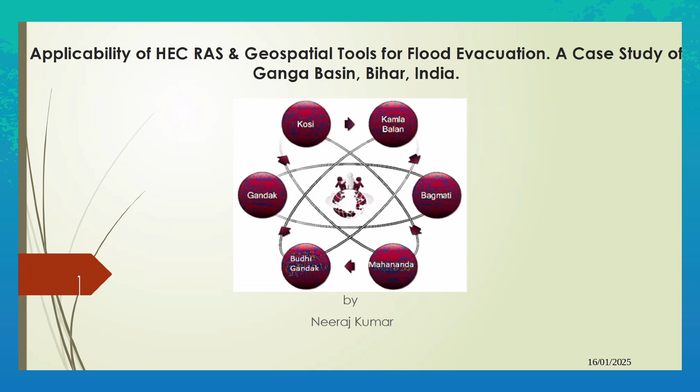So I'm going to present some of my work. The topic of the presentation is applicability of HEC-RAS and geospatial tools for flood evacuation, a case study of Ganga Basin, Bihar, India. HEC-RAS is software which is used for river study, and geospatial tools like satellite imagery and other geospatial software data we use especially for flood evacuation.

In Bihar, we have six major rivers: Gandak, Budhi Gandak, Bagmati, Kamla Balan, Kosi, and Mahananda. These rivers are among those that contribute maximum flooding, and these rivers are being degraded.

I'm going to share another slide. I want to show the location of the river. This is the entire Bihar. In the bottom, the Ganga River flows from west to east. Somewhere the broken green line is shown—the Gandak River starts from Nepal, and all these rivers start from Himalayan foothills: Gandak, Budhi Gandak, Bagmati, Kamla Balan, Kosi, and Mahananda. These are the locations.

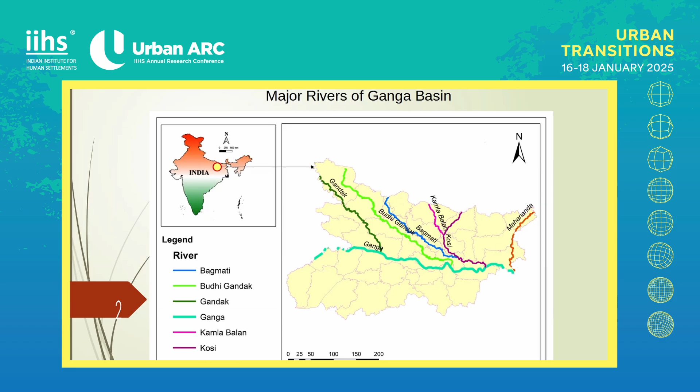I want to introduce something about what is happening here. This is a report published by the Centre for Research on the Epidemiology of Disasters. It tells that flood ranks the highest among disasters in the entire world, and people are also affected mostly by flood, among the number of types of disasters like flood, storm, earthquake, extreme temperature, landslide, drought, wildfire, and volcano. But flood is one of the most devastating in nature.

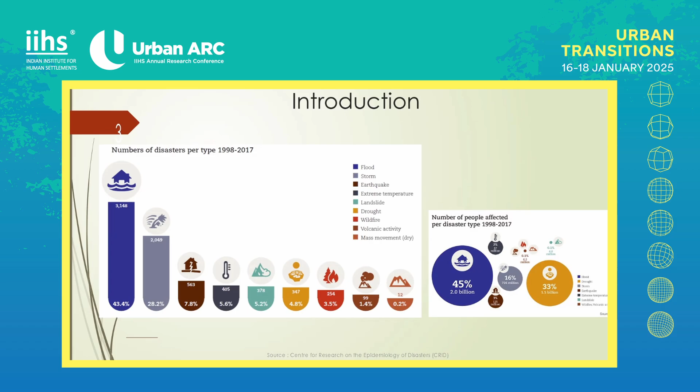And we are in the same place. Every year we have to start from new, from the beginning. Every year the center allocates a huge fund for restoration of river, shifting the people, giving them some grants, some funds, around 6,000 rupees every family. But the situation is same from past couple of decades.

So first we have to diagnose why this is happening, almost every year we are facing the same problem. So we started a study and found that the siltation in river is continuously rising in all major rivers. This is the graph of river Gandak.

From 1972, we can see the area was silt area. Silt area is that the river is flowing and somewhere the siltation is happening every year.

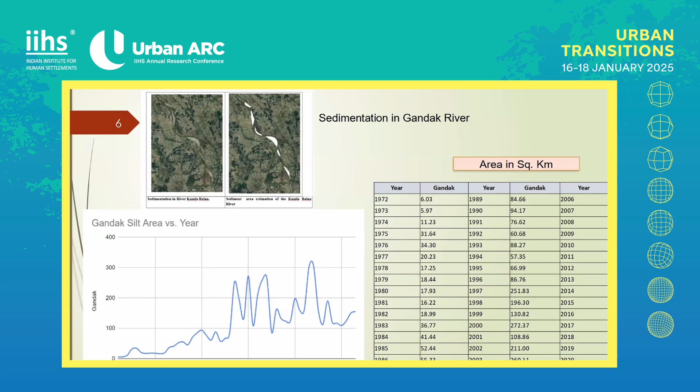So then we started digitizing this area from 1972 satellite imageries, 72, 73, 74, every year after the flood. We found in river Ganga, Gandak, Budhi Gandak, Bagmati, Kamla Balan, Kosi, and Mahananda, all these rivers are being silted and it is continuously rising. From 1972 we have the satellite image, so it is continuously rising.

There are several reasons for that. So this was one of our findings, that the river is being silted and we have to make some strategies for that.

If we are going to make any strategies for the evacuation of the people, how will we do it? There is a place called Gai Ghat, the main area from where all the evacuation strategies or evacuation planning is happening, from Patna.

you only have Yes, sir. 5 minutes left. Okay, sir. Okay. So

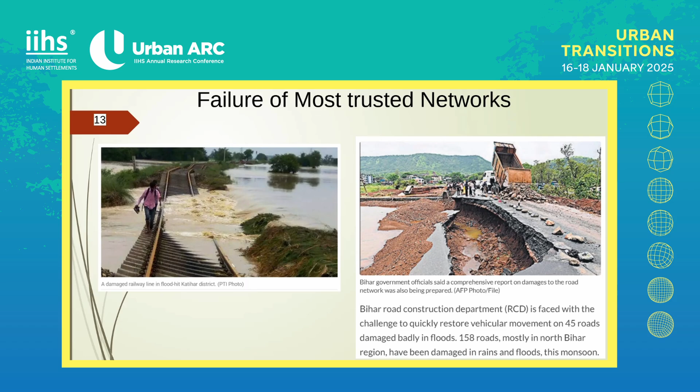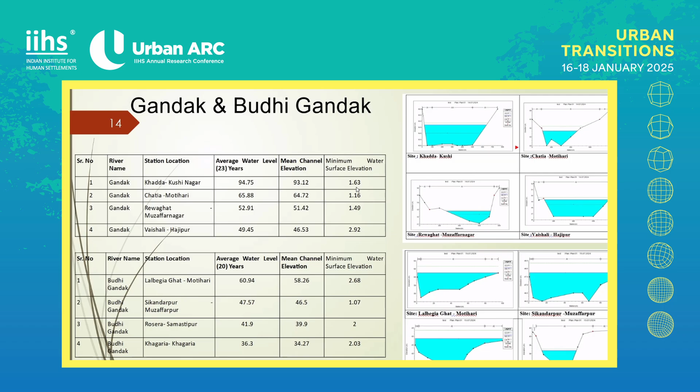We found that in every river we have a sufficient depth. Like in Gandak River, we have 1.6 meter average depth. In Budhi Gandak, we have 2 meter something. Bagmati 1.5 to 1.9 meters, and Kamla Balan we have 0.75 meter. Same in Mahananda and Kosi, we have sufficient depth to navigate the boats.

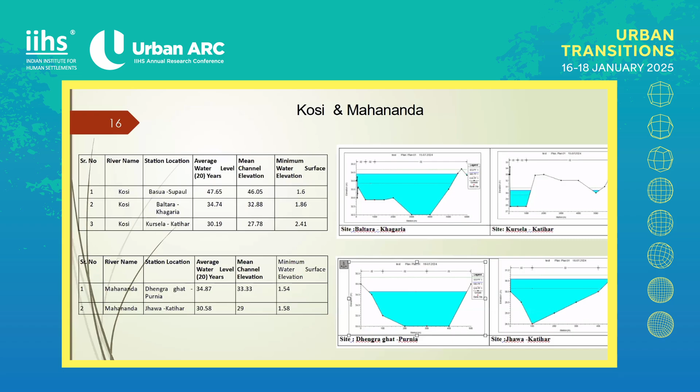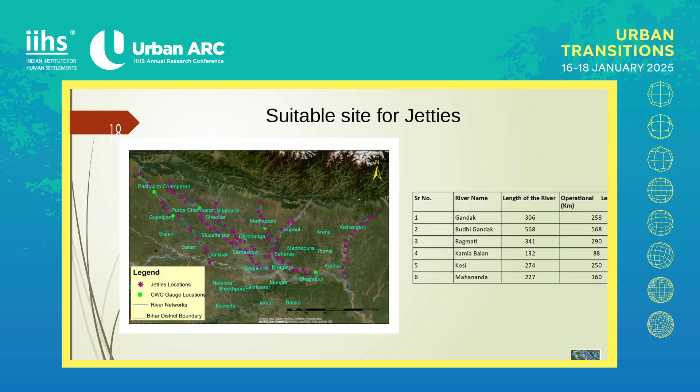These are route plans, like we have 1 meter depth, 1.5 meter depth, 3 meter depth, so which type of vessels we can use during the evacuation.

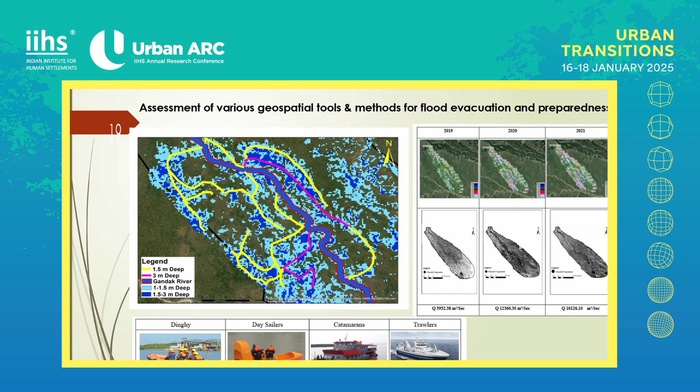Recently we submitted this report to the government of Bihar, and met the water resource minister and people from different organizations like MNREGA and flood protection department, and shared this report. We made this plan for entire Bihar, and have started cleaning activity and desiltation of the river, and people are working on this plan.

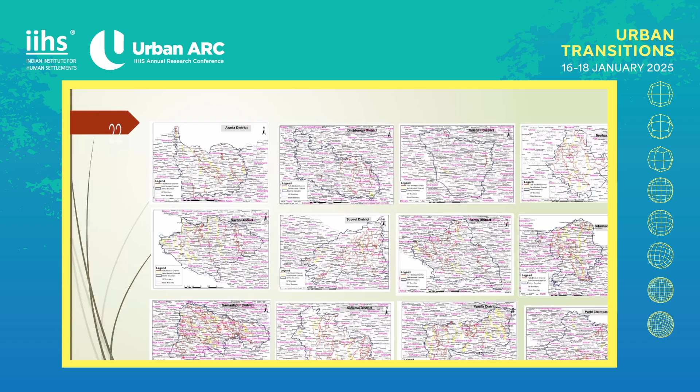And recently we got two Jal Prahari Awards for this work. One, the director of MNREGA got this award, and another, the DDC of Muzaffarpur, who initiated first making these channels active during the entire season.

So this was my research and findings. I cannot explain too well because of the time limitation. So this was my finding, and this was my strategies for evacuation and the things. That's all from my side. Thank you, you can ask questions.

Thank you, Neeraj. Thanks very much. Okay. Fantastic presentation. Great work. Yes, sir. Questions from the audience or those who are online?

Anyone? Any comments? Maybe I can ask you one question, Neeraj.

Yes sir, this is great modeling work. I think you've used GIS and spatial modeling in a really innovative way for an issue that really matters. From what I understand, you're predicting the water level depth that will be available as a result of flooding, which then gives you the ability to predict pathways for evacuation. That's a great way to use these tools and the information you have. Are there any methods you know of, or have you used, to validate your predictions of the model in terms of water depth?

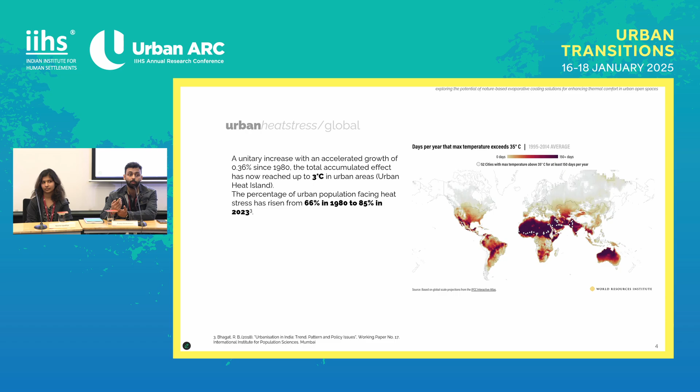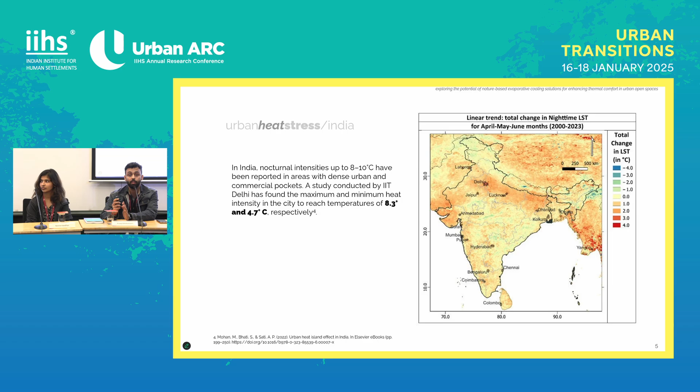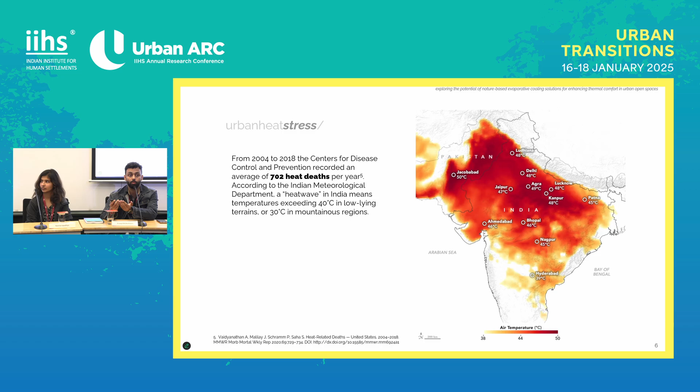So basically the change of lifestyle as well as the change in general materiality of the built structures that are prevalent in most urban areas today have given rise to this phenomenon called urban heat stress, which basically means that in urban areas you feel the heat much more than any surrounding countryside. In numbers, the global average is around 3 degrees Celsius, which is a cumulative effect since industrialization to now. And if we talk about India specifically, it is studied that around 8 to 10 degrees difference in temperature has been observed throughout the night as compared to the surrounding countryside. So this is a prevalent issue, and it might also have health effects directly, which convert to fatal issues or general illnesses.

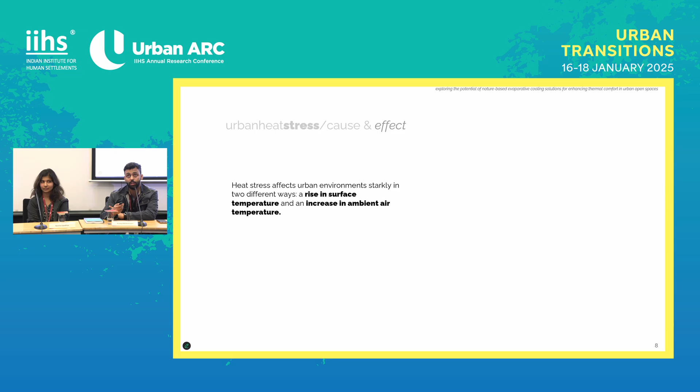The major causes for this, first of all, is the lack of green cover, because you need space to habitate this urban population. And then the kind of materials that are popular, which we've all talked about, concrete and glass and stuff like that, lead to significantly high rise in temperatures due to their material properties.

And predominantly this urban heat stress manifests in two ways. One is an increase in direct surface temperature, and the other is increase in the ambient air.

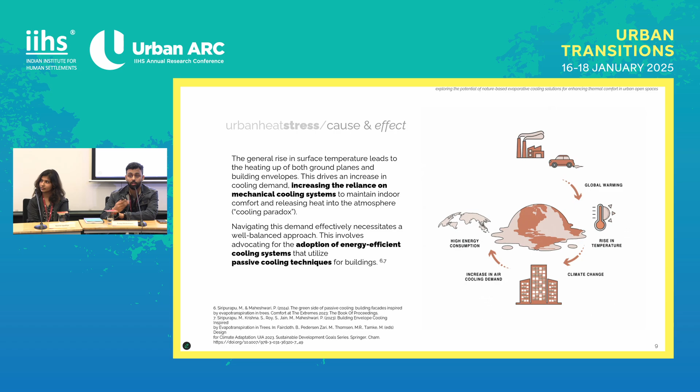It's causing a couple of effects. One of them is the cooling paradox, wherein you have your urban surroundings which are hot, due to which you will run air conditioning in your interior spaces, which is again going to further increase the heat stress outside.

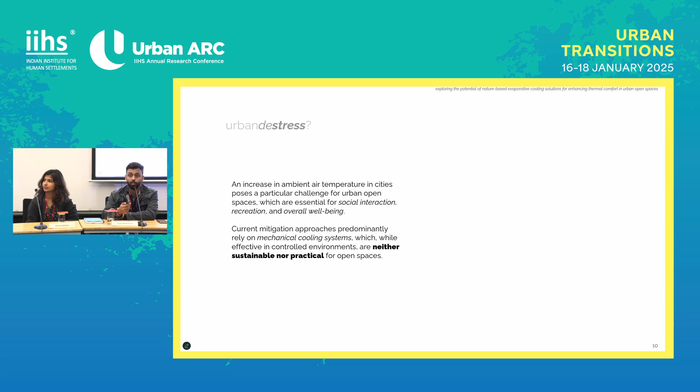And then we also are facing issues in making our open spaces a little more habitable, which are important in urban areas from a socio-ecological and economical perspective. But at present, due to the heat stress in peak summers, these spaces are not very functional, or it's very uncomfortable to stay in them. And another downside here is you can't even use ACs in open areas. So something does need to be looked at while we are dealing with this.

So what we explored was a way to tackle this problem two ways. Number one was trying to minimize the heat retention so that these areas do not retain heat in the first place. And then, of course, was an active way to counter the increase in temperatures or the increase in thermal discomfort that has been happening in these areas.

So when we are talking about absorbing materials and surfaces, an important part of it is the material properties. Talking about the material properties, the heat transmission that these materials do is the root of the problem here. So going for materials which have low heat transmission and higher reflectance will automatically alleviate the problem a bit, and will reduce the effect of the heat stress that is prevalent.

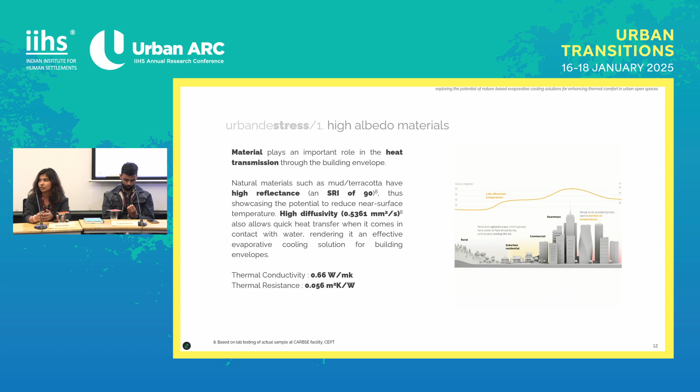Traditionally, this was not existent. The reason being, we were using materials which were not fancy but very functional. So one such material is mud, or terracotta in the modern context, which has a high reflectance and also high diffusivity, so it does not retain heat.

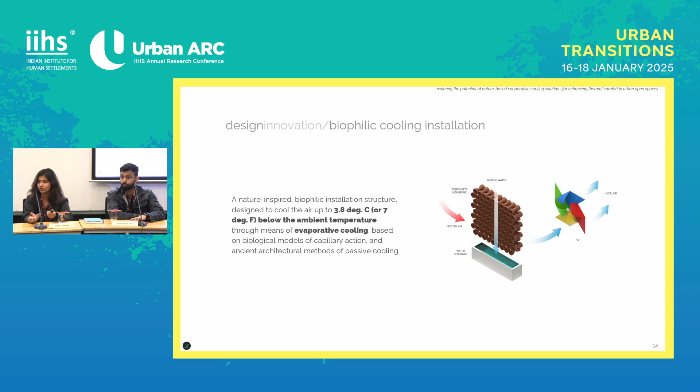So our solution to this was bringing together these two things: the high diffusivity material, that is mud, and a high evaporative cooling technique. For this, we used pots or screens made from terracotta pots, which could effectively bring down the temperature up to 4 degrees.

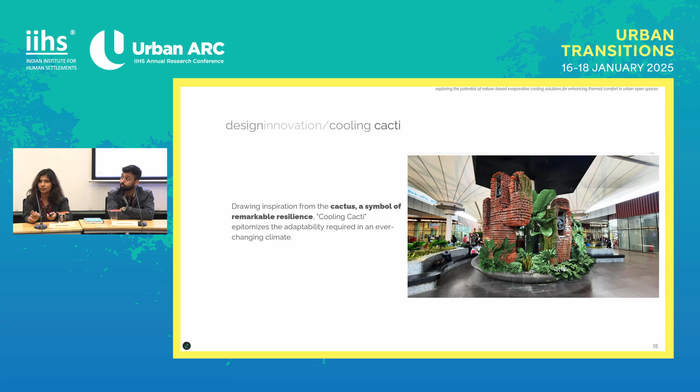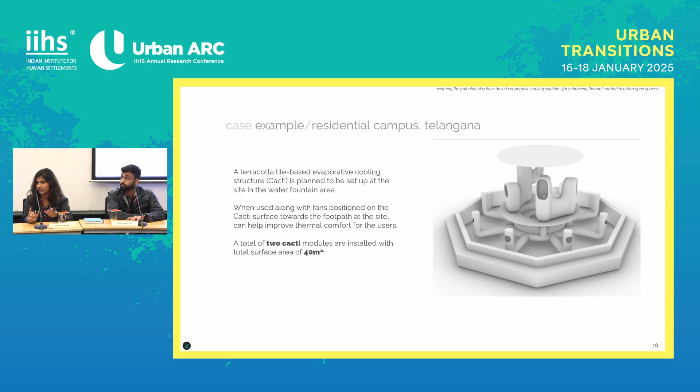A similar setup that we have used in a residential campus. So we wanted to simulate these results.

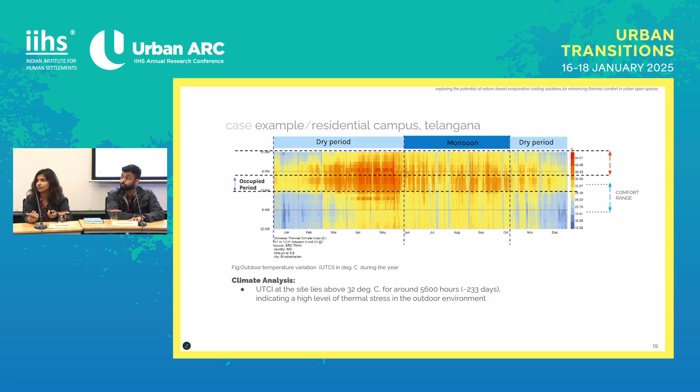Here we have the actual heat stress that is being faced in these open areas. And since it's an outdoor condition, we are considering the UTCI model of thermal comfort, wherein we've considered 32 degrees to be the comfort, up till 32 degrees to be the comfort range. Here we have 5,600 hours of the year which are out of the comfort range. Similarly for relative humidity.

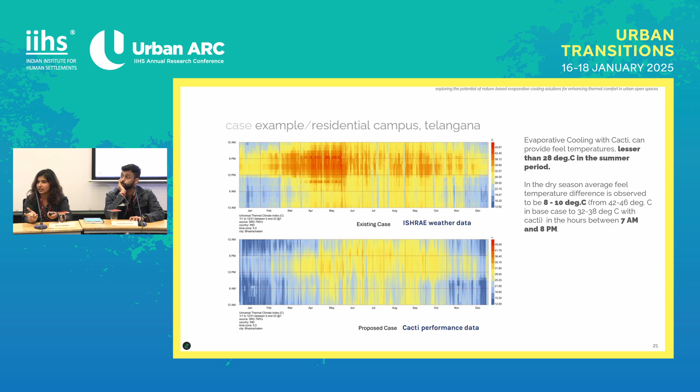Now, when we bring our solution, that is the cacti design, into the picture, we see that there's an 8 to 10 degree reduction in outdoor temperature during peak summers. And on average, we can maintain the temperature up to 28 degrees, which is well inside the outdoor comfort range. This is a simulation for the peak summer, wherein we can see a clear 5-degree reduction.

Similarly, for wet and dry season, we have simulated it and gotten the results to be much inside the comfort range. Conclusively, we have seen that it can bring down 10 to 10.5 degrees of temperature drop at its maximum efficiency, and that can reduce the discomfort up to 48%, almost 50%.

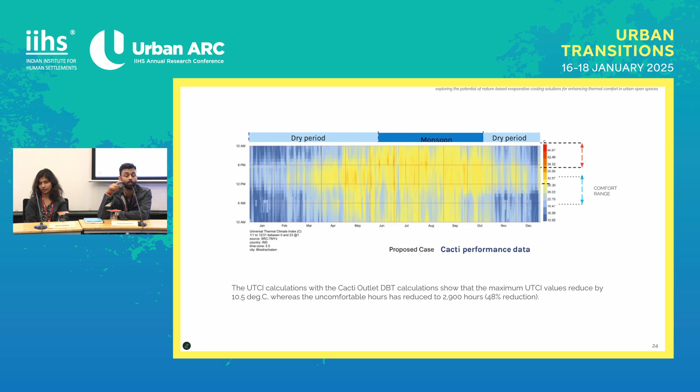As part of the thermal comfort model, we also have humidity and ventilation, which was also part of this. You can see the divisions between dry and monsoon periods. In monsoons, this cacti installation has fans installed in it, so it can also enhance ventilation. We do not need to run water during the monsoon period, which would further exacerbate the humidity. So we'd rather just run fans to enhance ventilation in the open space. That's how we maintain comfort in the humid region, and in the dry regions we run a combination of ventilation and evaporative cooling.

Just to conclude this, through this exploration - thank you. This is hopefully going to be a live project very soon, so we'll be able to get back with live data. But in terms of virtual simulations, what we found shows a lot of potential. This is not the sole solution, of course, but it shows a lot of potential in the kind of approaches we can take to these problems, and the kind of solutions that can come up with it. Just the potential of nature-based solutions or evaporative cooling is enough, and with a little more work on the design innovation bit, I think we can get good results.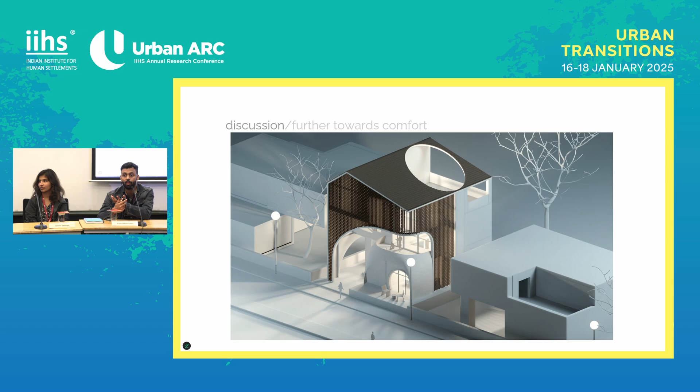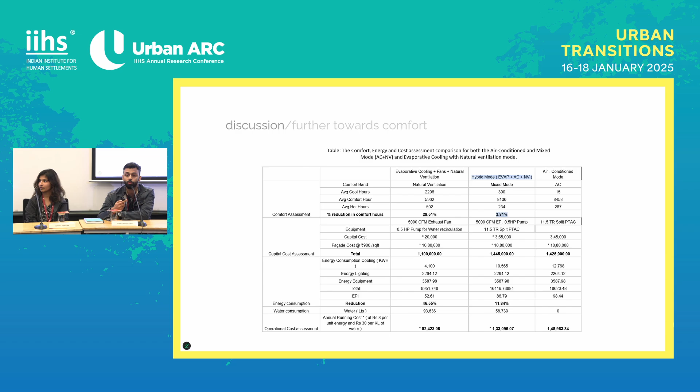Further to discuss this, we talked about two things. One is reducing outdoor thermal discomfort, but the other is to also bring a change in the materiality used in today's buildings. Part of that is about building envelopes, where we can introduce different materials, like we talked about terracotta, etc. At our workplace and studio, we work extensively with these kinds of materials. One of the things we have developed is a breathable facade made of terracotta, which is also based on evaporative cooling. Through simulations, we have figured out that we are able to work on a hybrid model, which mixes mechanical and passive means together to get a fully comfortable environment with less energy consumption.

And that is one possibility. The other is also, if in case we are able to...

Thank you, Pranjal. Okay, thank you. Well done, by the way. You completed the entire presentation, and even though you said you were not used to it, your graphics and your presentation were really nice. So let's move on to questions.

I will take the online questions first. There's one up there, which is a more practical one. I think the question is, what is the cost of this cactus method that you're doing for outdoor use? And I guess then I'll add a question, what's the area that it serves? And then the other question that's part of this is, what's the longevity of these solutions?

Okay, understood. So at present, this cactus solution, like the one we showed in the photos, is installed at the Ahmedabad airport, and right now it's serving organizations, so the costing is as per that. Recently, we also figured out an iteration wherein we made a cage outside and filled it in with terracotta waste. That is a much more toned-down or better version of this in terms of costing and all that.

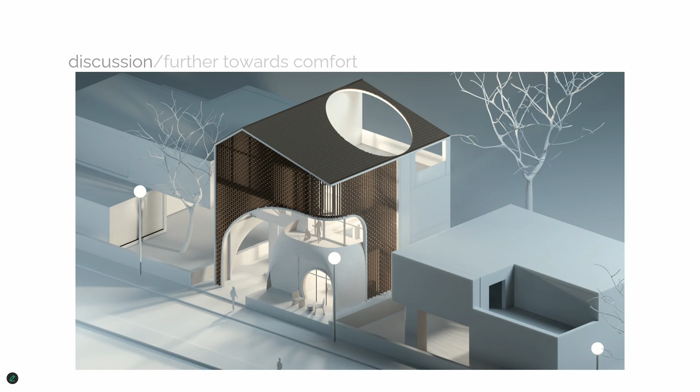What we've developed is a facade solution called the aeroleaf. In warm and humid climates you don't need water, you mostly need more ventilation. So we put up a screen, and on the other end of the space we put exhaust fans to facilitate cross ventilation. The screen acts as an insulation barrier and a shading device so direct radiation doesn't enter the home. It's made in terracotta, which has fundamental material properties to help bring the temperature down, though we haven't experimentally explored that yet—we're doing that now. Once we have that data, we'll know exactly how effective it is. The design has changed based on wind dynamics and the structural system.

Secondly, whenever we propose such a wall on a facade, we've seen nowadays people putting up pigeon nets and everything to stop pigeon droppings from coming in and destroying the structure. So how can we control this?

We always propose this as a second skin, not the main facade. Right behind this would be a window—it's not visible here, but if you look at this corner, you'll see a kind of window pane. So it's like a second skin; if I'm talking about this glass pane, it'll be right outside after a foot or so, so you can control whatever is coming in if you don't want the wind or air. Correct—but if I'm putting that cactus wall outside, pigeons will come inside if there's a cavity, if I'm putting two cups and creating the design.

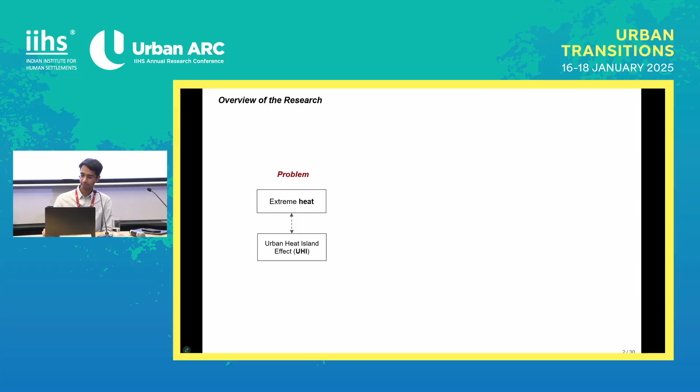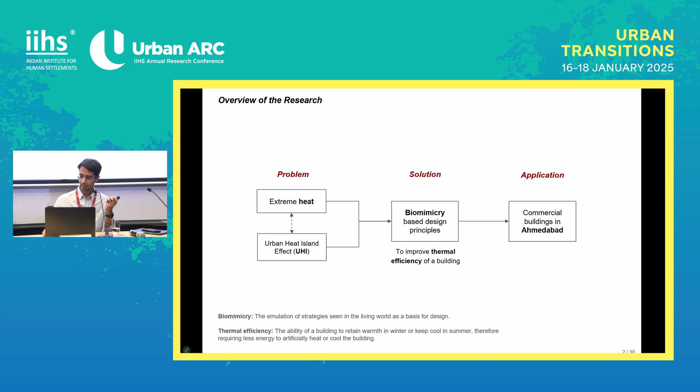The research addresses the problems of extreme heat and the growing urban heat island effect in Indian cities, and investigates biomimicry-based design principles that can help improve the thermal efficiency of buildings in high temperatures. Biomimicry is the emulation of strategies seen in the living world as a basis for design. The applicability of these principles is assessed with respect to commercial buildings in Ahmedabad, while the research also evolved as a critique of biomimicry itself. For this presentation, I'll be focusing on the relevant strategies to combat extreme heat.

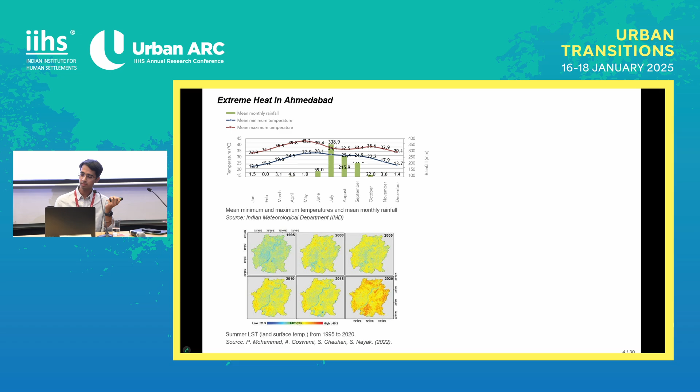Ahmedabad, like cities across the world, is grappling with problems of global warming and climate change. Ahmedabad has summer temperatures exceeding 42 degrees, and as a series of land surface temperature charts show, the temperatures are only getting higher over the years. This is also exacerbated by the urban heat island effect.

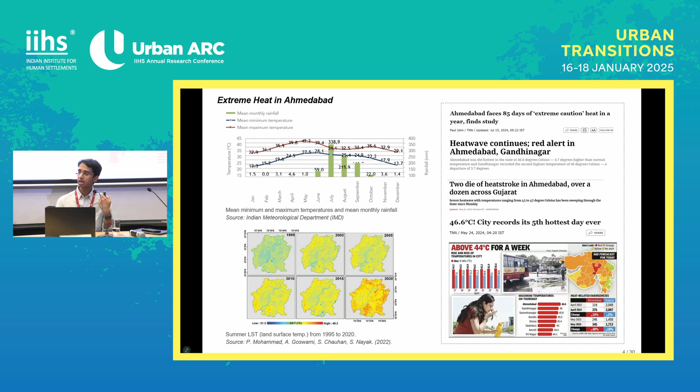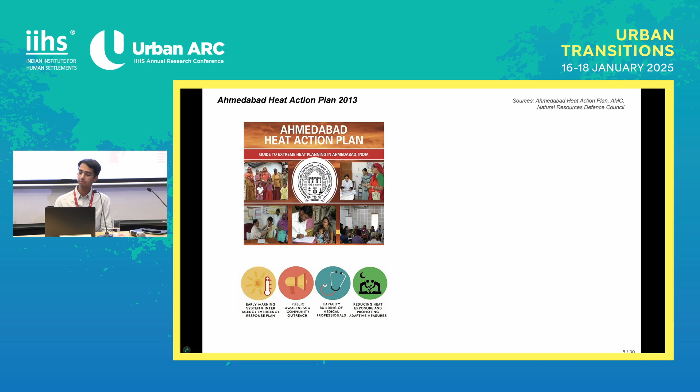Higher urban temperatures are associated with increased energy use for cooling buildings, changes to natural ecosystems, and enhanced heat stress on living beings. Ahmedabad has rapidly urbanized over the last few decades, and urban sprawl and loss of natural land cover has intensified the urban heat island effect in the city. There's an urgent need to find innovative solutions to make the built environment more resilient to extreme climatic conditions.

After the devastating 2010 heat wave in Ahmedabad that resulted in over 1,000 heat-related deaths, the municipal corporation, along with NRDC, prepared India's first heat action plan. This includes a cool roofs program, which is effective in low-rise buildings to prevent excessive heat gain. However, such roof-based strategies are not effective in preventing excessive heat gain in multi-story buildings, and there's a need to better equip high rises to maintain indoor thermal comfort under extremely high temperatures.

Most households and businesses use air conditioning as a typical form of adaptation to extreme heat, and India is projected to have one of the largest air conditioner stocks in the world by 2050. As previous presenters also explained, the waste heat from air conditioning systems also contributes to the urban heat island effect, and it can increase local air temperature by as much as 2 degrees Celsius.

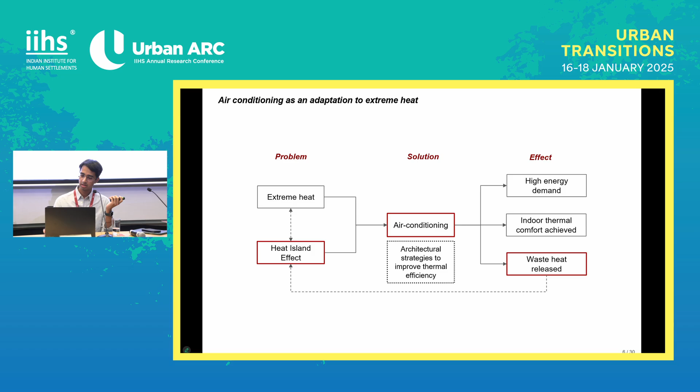Air conditioning systems are also energy intensive, and hence improving the thermal efficiency of the building would be an effective strategy to maintain indoor thermal comfort and reduce the need for air conditioning, hence decreasing energy consumption and also mitigating the urban heat island effect.

Much of the country's demand for air conditioning is by commercial buildings, which are offices, shopping complexes, restaurants, etc. In a study, it was found that offices contribute the most anthropogenic heat emissions compared to other building types.

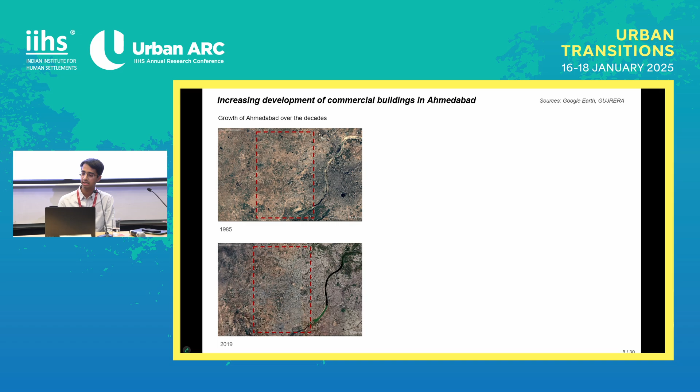Ahmedabad has experienced massive growth and urban sprawl in the last few decades, and much of this growth is driven by mixed use and commercial high-rise development. In 2022, Ahmedabad saw the maximum increase in fresh supply of office space among the 9 major Indian cities. Most of the new development is steel, glass, and concrete high rises, which are not suitable in the hot and dry climate of the region, and hence these buildings have to be air conditioned throughout the year and through most of the day.

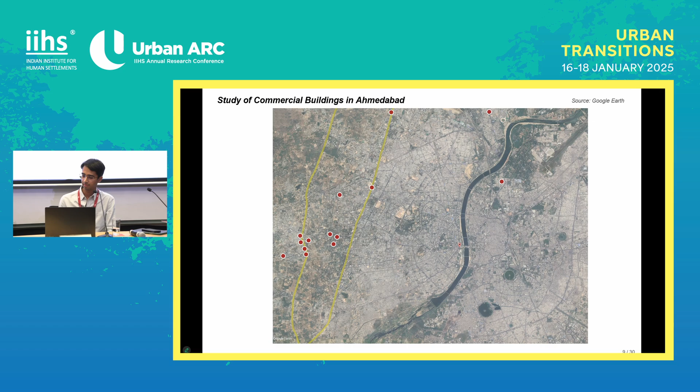For my research, I conducted a study of 15 recently built commercial buildings in the city of Ahmedabad. This was done to determine patterns in the buildings constructed in the city in the last 5 years. It was also found that most of the new construction is happening on the western side of the city along the SG highway and in Bopal.

The buildings were analyzed considering factors such as floor plate dimensions, heights, organization, location of circulation and services, etc. It was found that due to regular hours of operation and a central control system in most commercial buildings, there are possibilities of centrally controlled building-level strategies that can be used to improve thermal efficiency.

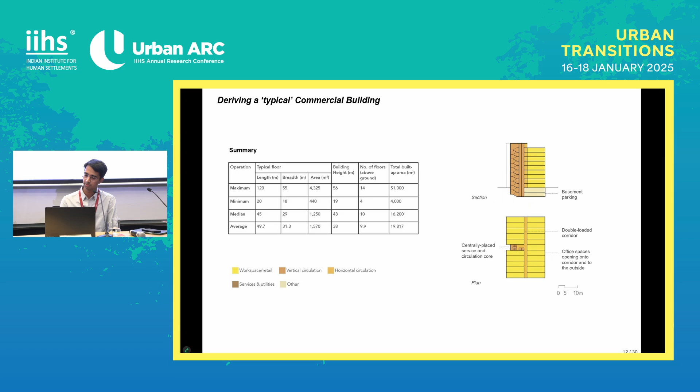The study helped derive a typical commercial building on which to assess the applicability of the various principles, which require a specific spatial configuration for their working. Most commercial buildings were found to have a central double loaded corridor and a centrally placed service circulation core, as well as basement levels.

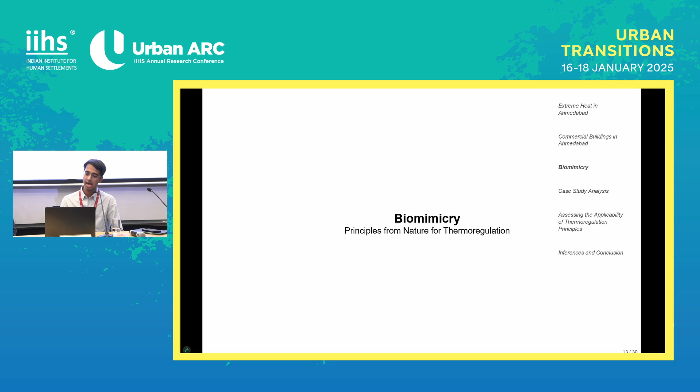So, how can buildings be better equipped to actually combat extreme heat and decrease air conditioning load? While there are several climate responsive strategies that have been used for centuries in buildings, there's scope to use biomimicry based design strategies to greatly improve thermal efficiency.

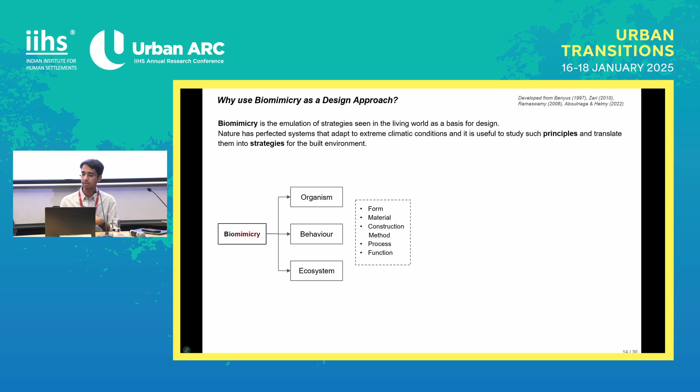Biomimicry, like I mentioned previously, is the emulation of strategies seen in the living world as a basis for design. Nature has perfected systems that adapt to extreme climatic conditions, and it is useful to study such principles and translate them into strategies for the built environment.

Biomimicry is the mimicry of an organism's behavior, or an entire ecosystem, in terms of its form, material, construction method, process, or function. And there are several ways of translating these nature based principles into design: a top down approach as well as a bottom up approach.

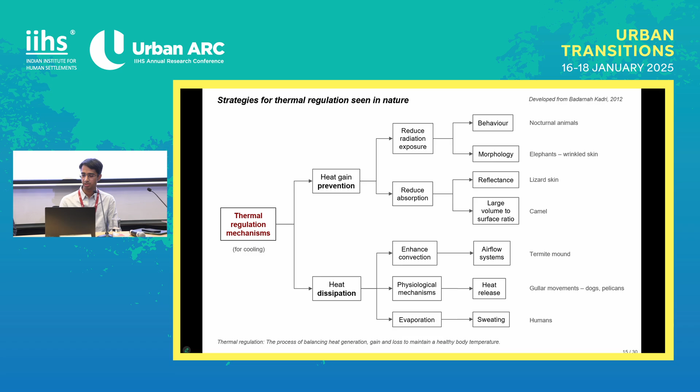The two primary thermal regulation mechanisms seen in nature are heat gain prevention and heat dissipation. Animals across the world have employed various strategies through form based adaptations as well as behavioral changes. For example, the large volume to surface area ratio seen in camels reduces heat gain, while airflow systems in termite mounds enhance heat dissipation.

A growing number of buildings across the world have also been adopting biomimicry based principles to respond to extreme heat. Analyzing these principles and understanding their applicability in the context of Ahmedabad would be useful in guiding how future buildings in the city can be better designed.

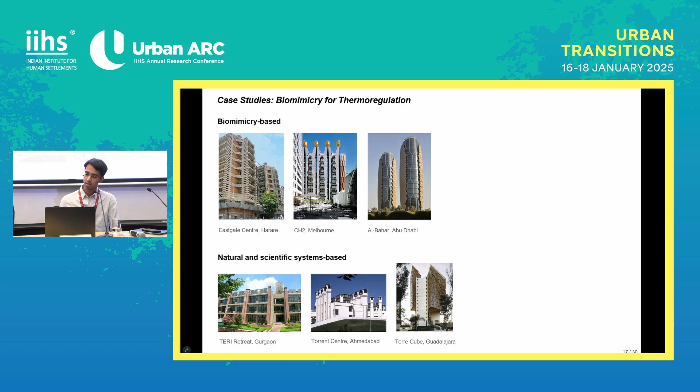For this research, I analyzed 6 case study buildings that have used biomimicry. The 6 case studies are a mix of commercial and institutional, but all of them have a centralized control with a day-night working. While the Torrent Center in Ahmedabad is the only building in Ahmedabad, the other buildings are in similar climates but may not be as extreme as that of Ahmedabad. But they all use principles of biomimicry for cooling.

So the thermoregulation principles in these buildings were analyzed with respect to climate and spatial organization.

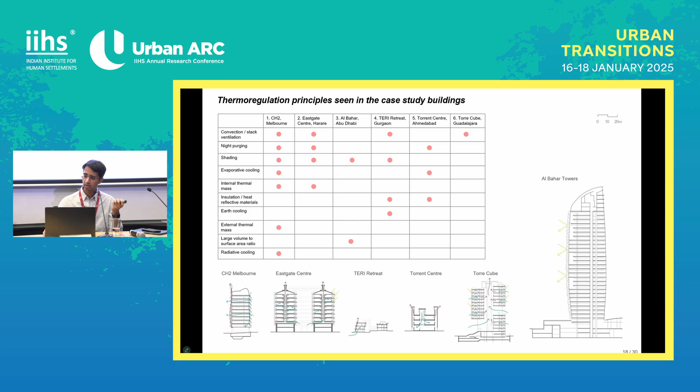This matrix gives a sense of the thermoregulation principles used, and several buildings used multiple strategies working together. The sectional diagrams show the variety of scales of implementation of strategies, as well as simplified air and heat movements seen in the buildings.

It is essential to determine which of these principles is actually applicable in the context of Ahmedabad. So, the case study buildings showed the possibilities of translation of these principles from nature into strategies for thermoregulation, along with the spatial requirements for the working of these strategies.

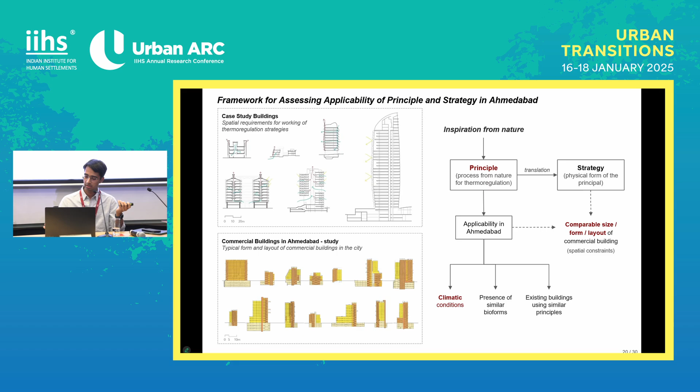The study of recently built commercial buildings in Ahmedabad gave an idea of the typical form and layout in the city. So each principle was then assessed based on the different climatic conditions required for its working, and also the comparable forms or layouts of commercial buildings found in the city.

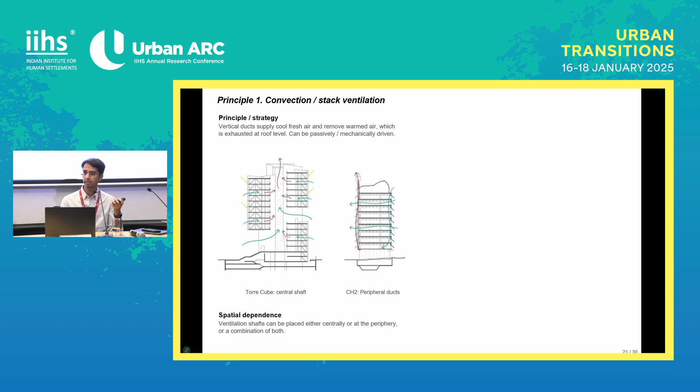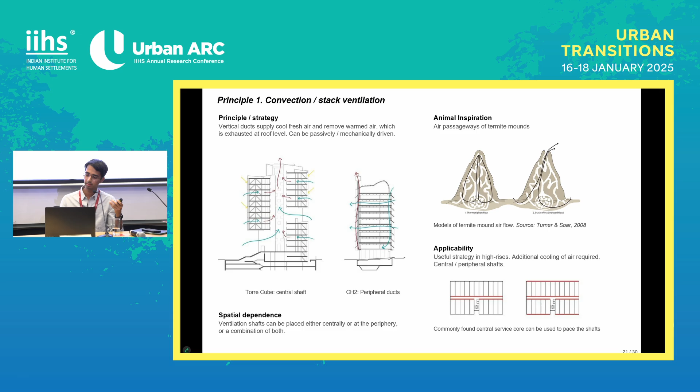The first thermoregulation principle I'll be talking about is convection or stack ventilation. Here, vertical ducts supply cool, fresh air and remove the warmed air from the building. These ducts can be placed centrally as seen in the Torre Cube, or at the periphery of the building as seen in CH2. This method is inspired by the air passageway structures seen in termite mounds, and it's a useful strategy given the climate and common building type found in Ahmedabad.

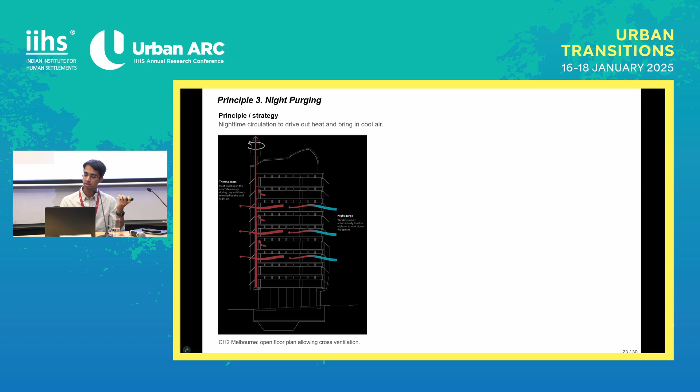Night purging is the principle when nighttime air circulation is used to drive out heat accumulated during the day and bring in cool air. The CH2 building has an open floor plan that is ideal for heat to be driven out at night, and according to a study, night purging alone can lead to a decrease of 14% of the cooling load in a building.

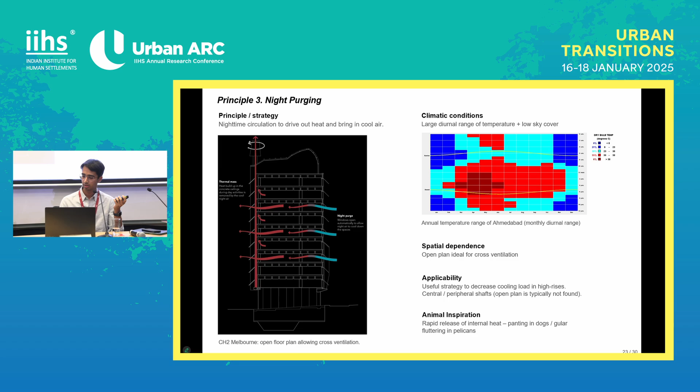Ahmedabad has a large diurnal range of temperature throughout the year, and the use of shafts might be required in the typically found commercial buildings since most of them don't have an open floor plan.

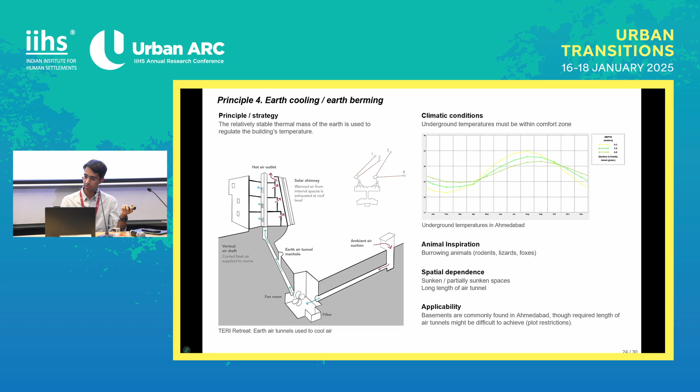Earth cooling is when the relatively stable thermal mass of the earth is used to regulate the building's temperature, and this is a similar strategy to burrowing animals. Earth air tunnels are also used in the TERI building, as seen here.

The underground temperatures are quite moderate in Ahmedabad throughout the year.

Buildings can also employ a kinetic facade that is modulated in response to the sun position, inspired by similar movements seen in plants. For example, the CH2 building uses louvers, while the Al Bahr towers have a kinetic facade across the entire building. This is a skin-level strategy.

The use of thermal mass can also be used to slow down the transfer of heat from outside to inside.

So there's a wide range of design strategies to maintain thermal comfort based on concepts of biomimicry. This research concludes that using various nature-inspired systems of cooling and ventilation are effective to varying degrees in reducing the space cooling load and maintaining indoor thermal comfort in peak summer months in a climate like Ahmedabad.

The most effective principles for Ahmedabad, with respect to the hot and dry climate and commonly found commercial building typology, are evaporative cooling, earth cooling, and night purging.

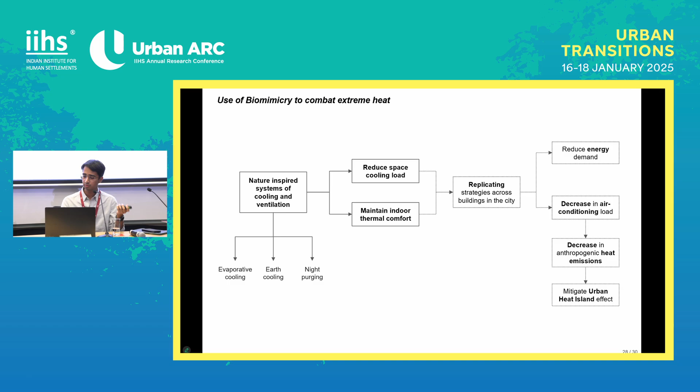To drastically decrease the need for air conditioning in hot climates, a group of principles, not a single system, derived from natural organisms is needed in a building. Adapting building systems to improve thermal efficiency and replicating these strategies across buildings in the city can decrease air conditioning load, thereby reducing overall energy demand and mitigating the urban heat island effect by decreasing anthropogenic heat emissions.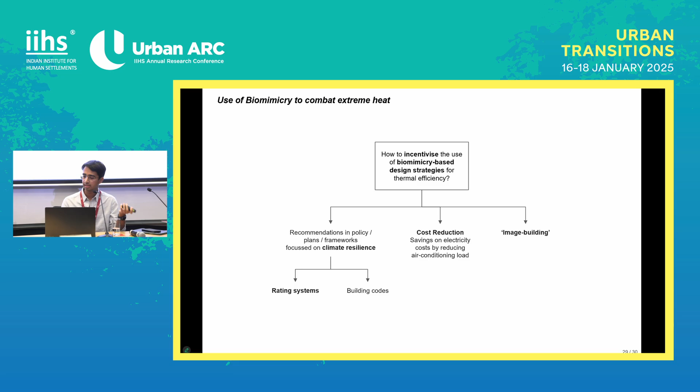So how to incentivize the use of biomimicry-based design strategies for thermal efficiency? These are often not employed since knowledge is either lacking among stakeholders or there are not sufficient incentives to utilize them. These can be incentivized through guidelines or policies such as rating systems or building codes.

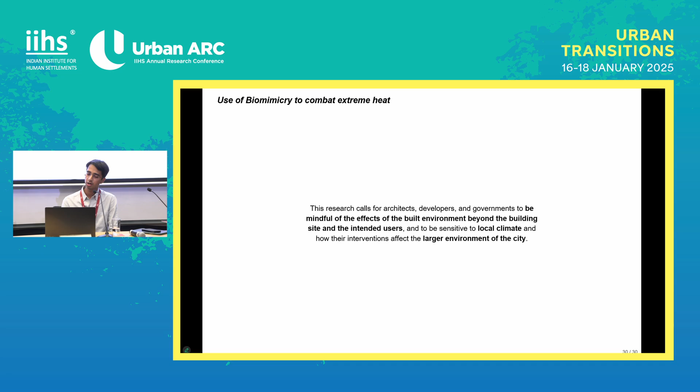Also promoting them by saying that they help with cost reduction or image building, as seen in some of the case studies. Finally, this research calls for architects, developers, and governments to be mindful of the effects of the built environment beyond the building site and the intended users, and to be sensitive to local climate and how their interventions affect the larger environment of the city.

Thank you. Thank you, Anand.

That was a very clear and very well articulated presentation, and I really liked the way you were very specific about the strategies that were used and how they relate to the biomimicry principles. So, very good presentation. Let's move on to questions.

I don't see any online, so we'll move on to the crowd over here. First question coming from here.

I want to ask how many degrees change would there be? How many degrees would be reduced? Any idea? Can you be quick about it? I think there's a lot of questions, so be quick about your answers. We'll take a lot of questions then.

This is very specific to the building type and also the strategy that is used, so I cannot give a comment on the exact temperature change.

Because you said in the beginning that you began with an intent to critique biomimicry, and now you're giving us a proposition. I just want to know more about that critique-to-proposition framework and what happened to the critique. The critique is also part of my research, which I chose not to present here because I felt it was a little away from the theme of Urban ARC.

But maybe we can. So I mentioned a point about image building and how many architects have used this concept of biomimicry to promote the building itself. In some cases, I also felt that biomimicry principles were not used at a performance level, but more at a surface level, and this in some sense also relates back to a kind of greenwashing that some architects do.

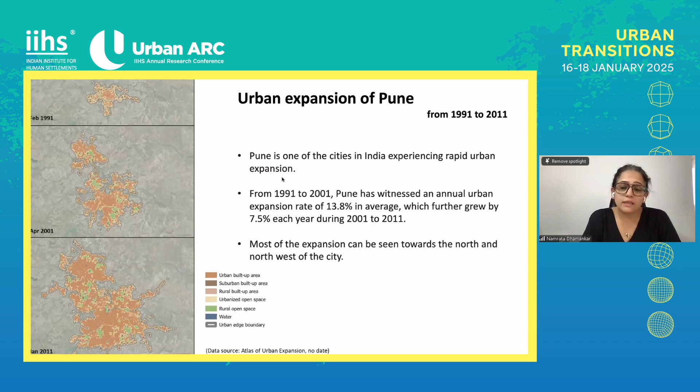What that is leading to is urban development, urban sprawls coming up all across, and that directly has an impact on the kind of urban heat island that we are producing with all the development that is happening.

Some land surface temperature data, showing over the last decade, right from 2013, shows that there were no changes in terms of the key differences in temperature rise, because there has been intense temperature rise overall. But what you can actually see is that there is significant variation across the geography.

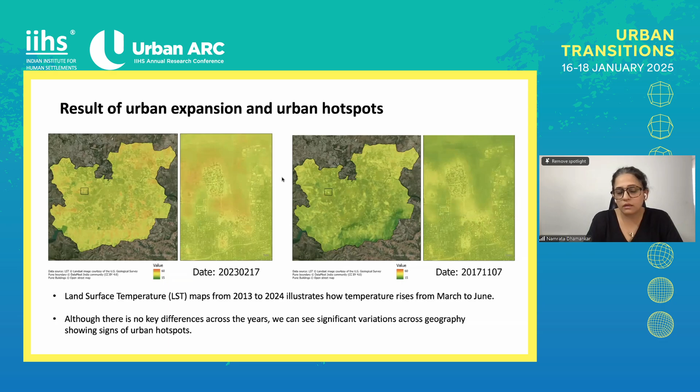You can see that the hotspots are actually cropping up, not in the center part of the city, but more towards where the newer development is happening. So it's very evident that with urbanization, these hotspots are now developing across the city.

Coming to the context of our study, we identified the area of our context where we looked at informal settlements. We had to identify two or three settlements, which we then picked up. For our particular study, we picked two settlements with diverse contexts and settings. The first image on the left, Kishkindha Nagar, had a setup of being situated on a hillock.

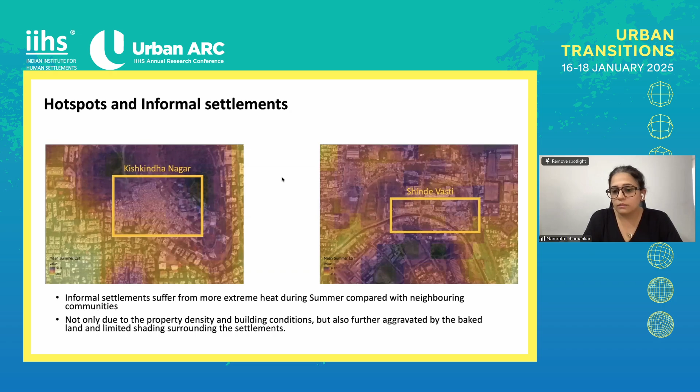That was the setting that this particular settlement had. Whereas the Shinde Vasti, on your right, had a context of being located next to a nala, a water stream. So two very diverse contexts and settings, but both experiencing the same problems of extreme heat stress, because of the kind of settlements seen here.

As part of this project, coming to the methodology used to develop this framework, it was based on a concept called co-production, where we looked at how you can involve people from different backgrounds and expertise to come together and co-create or co-produce something that can make a difference. So there is no hierarchy here. We are trying to move away from the traditional approach, removing hierarchy barriers and giving equal importance to all stakeholders in this method of co-production.

For this project, we had focus group discussions and interviews with all societal actors, as we call them, from civil society organizations to citizens, to the people experiencing these issues in the slums, slum dwellers, and also architects and practitioners who could face that problem.

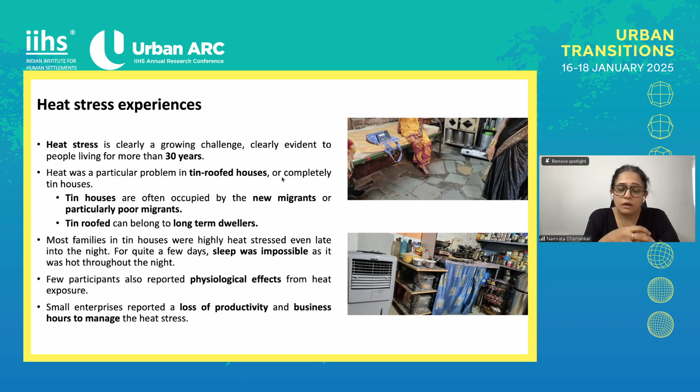There are very small enterprises there too, and they have noted that they have lost productivity to work, lost their businesses, and have had to manage reduced business hours as well.

In terms of the intersectionality, you can see that women are more affected during the summer months than their male counterparts. We can also see senior citizens who are at home being affected more.

Women have to change their cooking hours because they are unable to work in the kitchen with that heat. So there have been many issues identified as part of these focus group discussions, and of course, there are certain strategies.

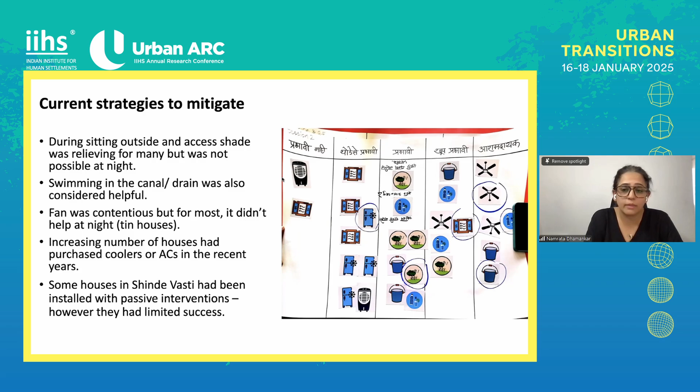Typically, what we see is that over the years, people have taken in cooling, fans or coolers to make themselves feel comfortable. But the extent to which this comfort works is also very limited. People are saying that even fans and coolers today are not working with the extreme heat.

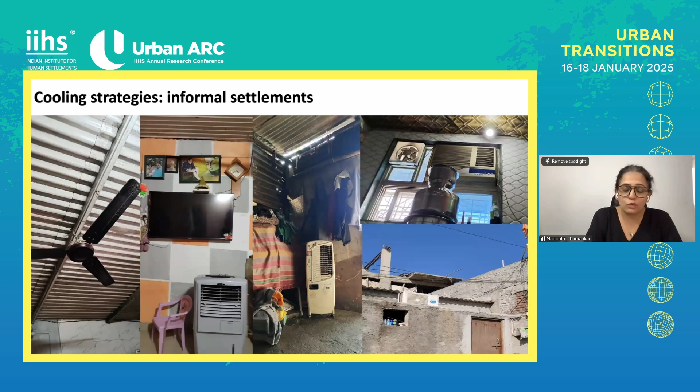So then people are resorting to strategies like taking frequent baths, but again, there is a water shortage problem. So one problem sort of leads to another, which is something we typically notice.

These are the strategies and their aspirations. Obviously, if they get the money and the funding, they would want to change their house itself. With the tin roofs that they are facing, they feel that an RCC or brick structure would give them more adaptability.

So that is what they all aspire to have. We could see that air conditioning was not an aspiration for these people. It was more to do with comfort, in having a better quality roof or structure over their heads.

This is just to conclude that we can see there are certain very specific policy implementations required, and how slum dwellers should also be made a priority in the cooling interventions we are looking at as a city.

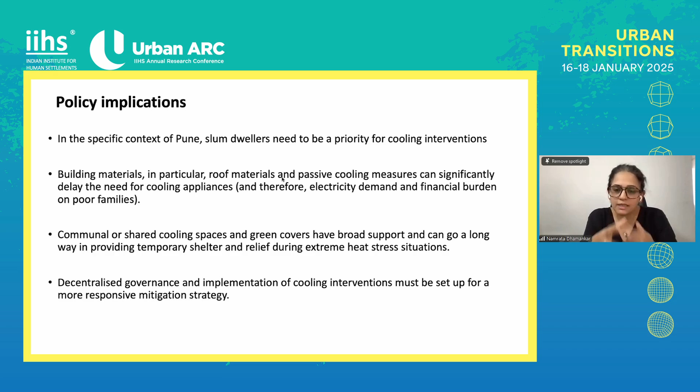One of the key findings we want to take ahead is that communities are also okay with having shared cooling spaces or community-level interventions that can support cooling during extreme heat stress situations.

To conclude, this entire project was a joint project done with the University of Leeds and BNCA. We had the civil society organization represented by Basera Foundation, and the co-production methodology was something we looked at from the Leeds Social Science Institute.

This is an ongoing work, and we hope to scale this with more focus group discussions and actually have pilot implementations of certain projects.

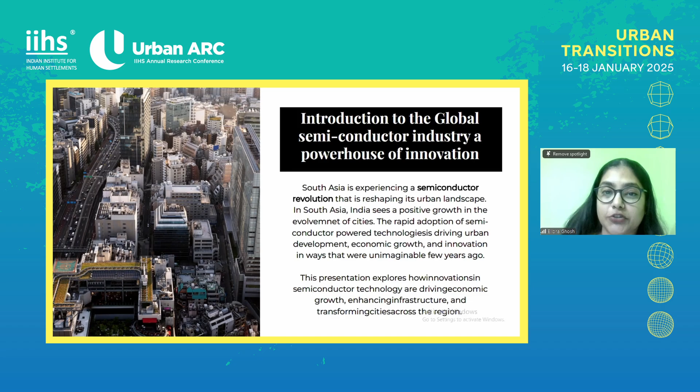Valued at over $500 billion in 2023 and expected to grow further, this industry is projected to reach about $1 trillion by 2030, making it worth all investments. With the turbulent pandemic that has hit us all very effectively, the demand for these chips has grown as industries ranging from healthcare to logistics rely more heavily on digital solutions. The race for some Southeast Asian countries to get into this global semiconductor industry is very open and very evolving, even if it is complicated by factors like great power rivalry.

become a semiconductor powerhouse as the world's fifth largest economy pushes for self-reliance in manufacturing. Modi has set up numerous goals to propel the country's semiconductor sector forward, with the latest and biggest target being to grow the country's electronic sector. India is increasingly viewed as a viable alternative to China for companies, and we also see that

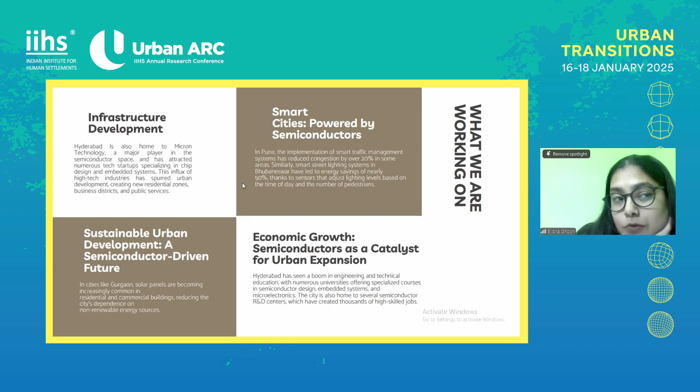But these great initiatives always come with certain challenges. Despite its potential for urban transformation, not every outcome is welcomed by all. So addressing these challenges, the first one we will discuss is infrastructure bottlenecks.

Setting up a semiconductor manufacturing unit requires significant infrastructure, including a stable power supply, water supply, and reliable transportation networks. Many South Asian cities, particularly in India, face a lot of infrastructural bottlenecks that could hinder growth. That is one of the reasons why the government is still very skeptical about when, where, and how this industry should be put up.

Elora, 5 minutes left.

For example, the setup of a semiconductor industry in Jagi Road in Assam intensified certain debates between the states of Assam and Karnataka. I happened to read this in one of the reports, which stated that the land of Assam has a lot of incapabilities. Assam has historically been a very underdeveloped state in terms of industrial and technological infrastructure.

Tata has also invested about 27,000 crores. But amidst all of this, Tata Group and the central government acknowledged this risk, majorly due to the strategic location. Amidst all the backlash, the government said that Assam has a very strategic location and there is a lot of need for infrastructural growth there. Jobs need to be set up there.

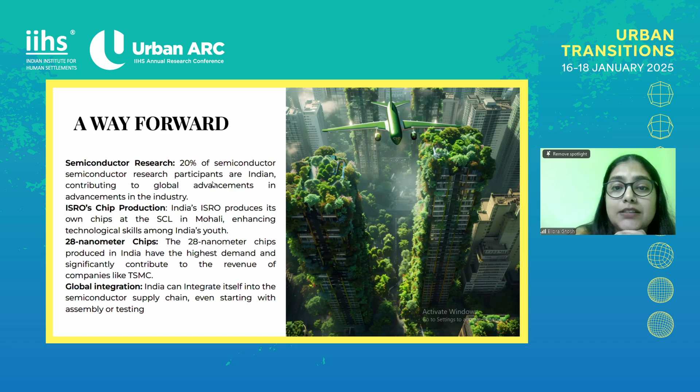Research has already been started. A lot of work has already begun on growing this, but somehow we are still not able to get through on how we can definitely get into this industry and achieve global integration with the other semiconductor supply chains. We have started with the work, but there's a way forward. There's a long path we still have to reach.

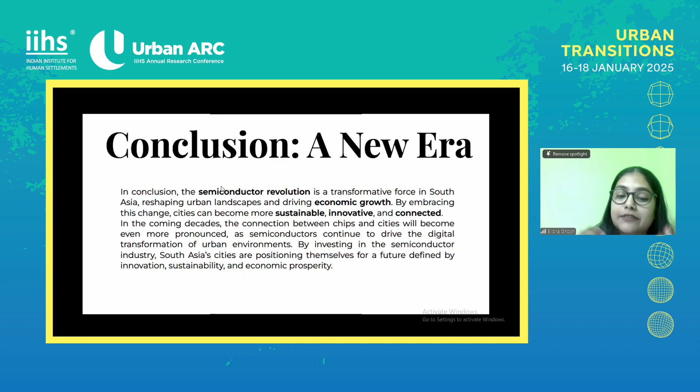So what should be done? We have to think about certain sustainable, innovative ways of amalgamating a lot of cities together to make this revolution work well in the country, and to bring policy and governance measures that need to be worked upon. The connection between chips and cities will become even more pronounced as semiconductors become part of all urban environments in the country. So by investing a little more into the semiconductor industry, a lot of South Asian cities can position themselves for a future defined by innovation, sustainability, and economic prosperity.